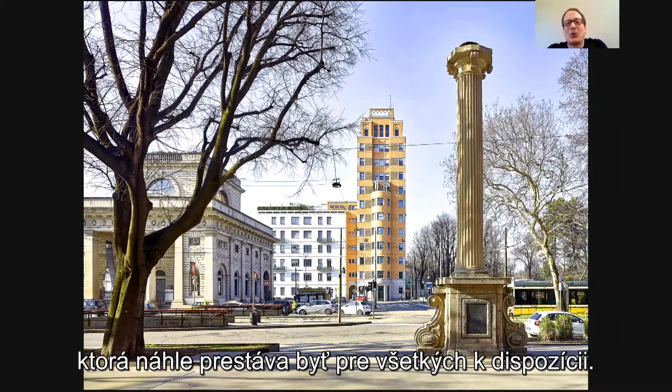So what I'm showing with these images is that the city, the vitality, the richness that we really enjoy about the city, don't come from monuments. They don't come from grand urban plans and axes. What they come from is a texture of the city. It can come from big buildings or small buildings, and it actually comes from a condition of incredible heterogeneity - but a heterogeneity that stops short of being a free-for-all. This isn't the heterogeneity of a new city in China, in the Gulf states, or in Canary Wharf in London. This is a heterogeneity where one looks at what came before, but then adds something new, something that somehow refers to the existing place.

And now I'm going to show, I think, 5 projects that we've completed in the last 8 years. Some are very recent, and as I said, a couple are from Zurich, but they're from different cities.

You'll see how a single practice, Caruso St John, working in different city centers, has celebrated and been inspired by the difference of the situations, and how we've allowed these differences to inform the character of the buildings, but also how we refer to certain paradigmatic urban buildings. The buildings of Milan I showed you are often references for us, and somehow those references creep into designs for buildings in Zurich, but could also creep into a design for a building in Cologne.

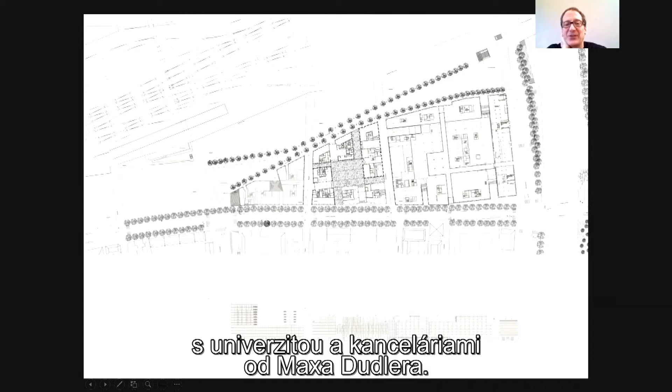So our building, this is the ground floor. The ground floor has the entrances to the offices, to the parking, to the apartments, and has retail. So it's quite complicated, the ground floor, to reconcile all of these entrances and exits.

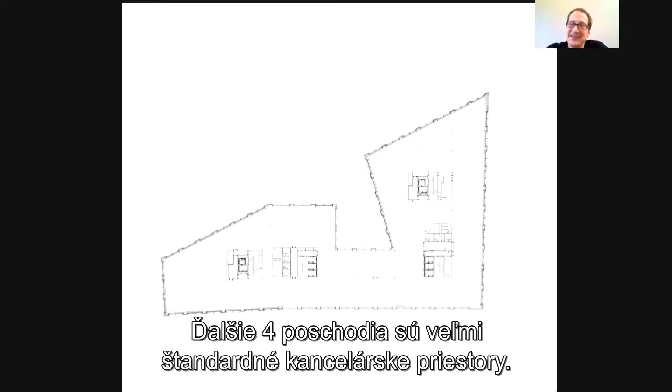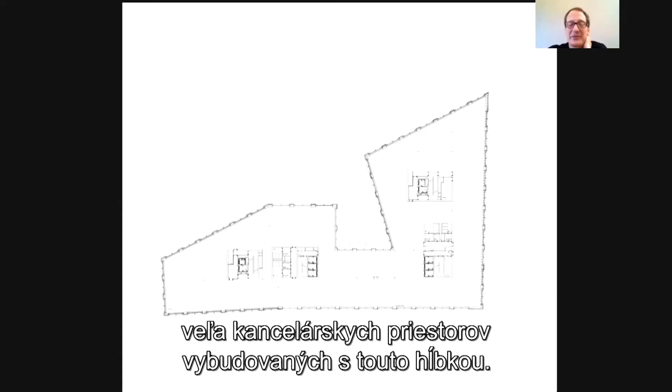Then the next 4 floors are very standard floor plates for office space, quite deep at the time for the Zurich market, but actually we were a little bit ahead of the curve because now there's a lot of office space that's been built with this sort of depth.

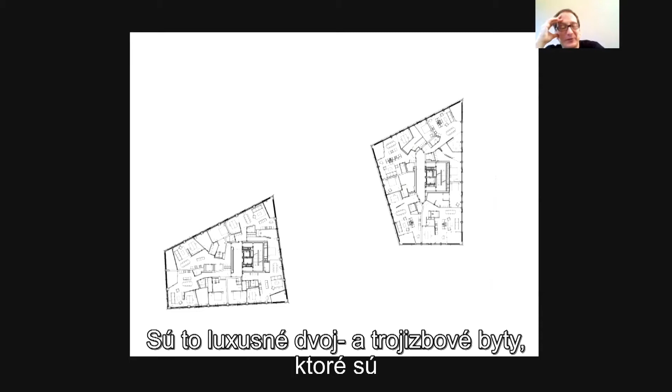And then above that, these 2 towers of apartments, a very big mix of apartments, so different kinds of apartments on different floors. And these are plans of the 2 top floors, the penthouses, which are really quite luxurious, 2 and 3 bedroom flats. Very ambitiously planned, and I'll show you a few photographs later.

But for us, the program is a given. It's an urban building. It has these commercial uses, and they have to be accommodated in a good way. But for us, the really interesting thing was, how do you make a building whose image and whose construction and whose presence in this place will really contribute to the idea of a city that's based on existing streets.

So this one, Lagerstrasse, but then this street, which is this new street called Europaallee. Our idea was that we would make a building out of masonry, not stone, because if we made it out of stone in the 21st century, the stone would be rather thin and it would really feel like a veneer. Instead we used large precast elements which are supporting themselves, so that the idea of the structure of the facade, the performance of the facade, is somehow making the image of the building more communicative.

And you can see that the facade is a bit heavier at the bottom and it gets lighter as you go up, and the way in which window openings respond, between the retail spaces, the office spaces, and the apartments. In a way the very practical requirements of the program connected to the formal and constructional ideas of the architecture give the building its image, give the building the means to become an articulate part of the city.

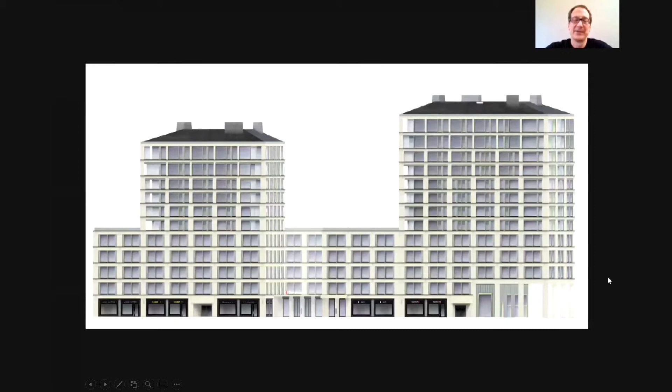So this is one of the elevations, and these are some of the drawings of the construction of these elements. There's an arcade at the head of the building, which has a bar, and it has these curtain-like precast elements in green. And then the more standard facade with these large column elements and beams and infills.

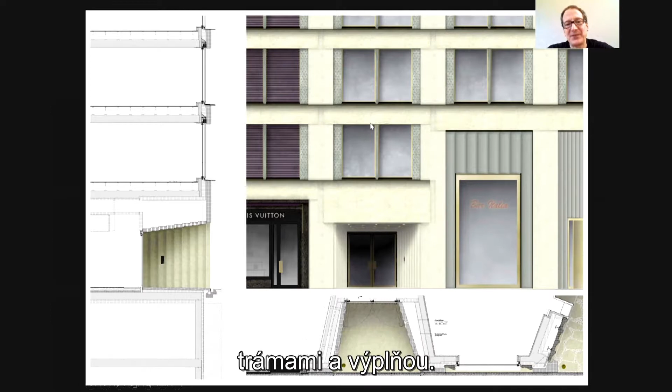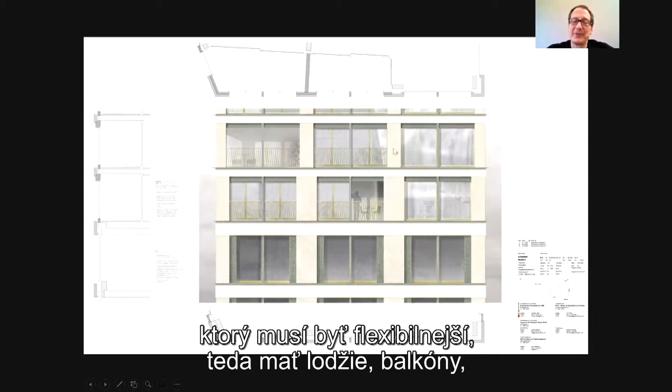And this is the residential entrance, which is more elaborated, and the shop front. The shop fronts are made in polished precast concrete, and the transition from the office building to the apartments, which need to have more flexibility in terms of having loggias and balconies and opening windows and smaller rooms like bedrooms and larger rooms like living rooms.

So there's quite a bit of variety within the facade, but that variety is controlled with an overall tectonic identity, which is about these columns and the beams.

We worked with an amazing precast company based in Flanders called Decomo. It was their first and almost their only building in Switzerland. It's very unusual for subcontractors from outside Switzerland to be involved in Swiss buildings, but they won this contract. And we did many, many tests about the textures and the finishes that one can achieve in precast. I mean, precast concrete really is like stone was in the 19th century.

It's a way of making incredibly high quality and differentiated material without involving enormous human power. You don't need to carve it, you can cast it.

So this is the building, that arcade I talked about with the bar and the green curtain-like facade infilling it, the residential entrance and the office facades. All of these are precast elements, they're all holding their own weight, sitting on a foundation on the ground. The bar facade, the entrance to the apartments, with the detail of the lighting.

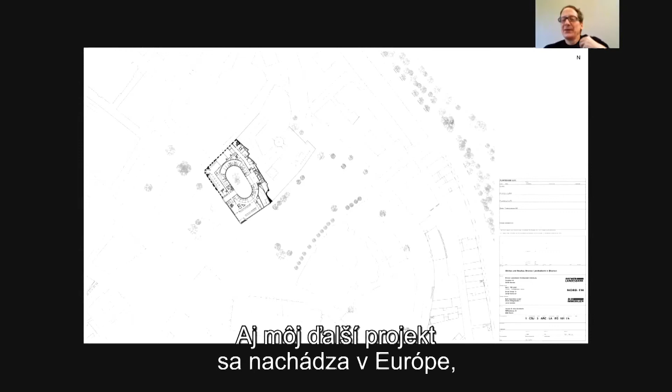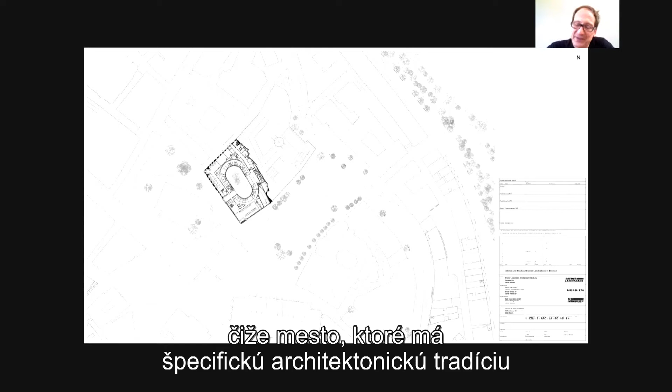So my next project is also in Europe. It's in Bremen, a kind of very old northern German city, a city that was an important Hanseatic port. So a city that has a very specific architectural tradition of building in brick. You know, Bremen, Hamburg, Lübeck, all of those Hanseatic port cities had this amazing big brick tradition.

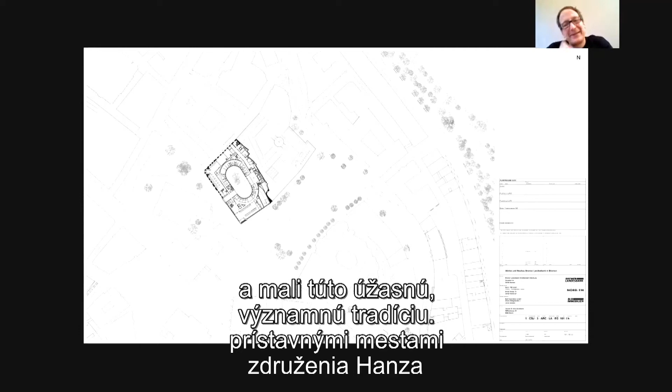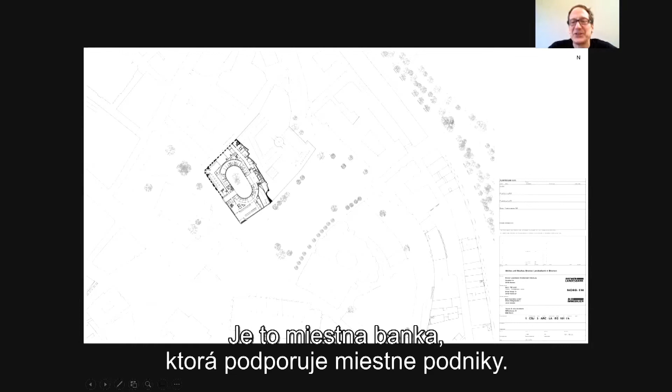And we were invited to do a competition to make a headquarters building for the Bremer Landesbank, the local bank which supports local businesses, to replace a building that they built in the 1980s, which was functionally a very poor building, but architecturally was even worse. And the building couldn't be on a more important site.

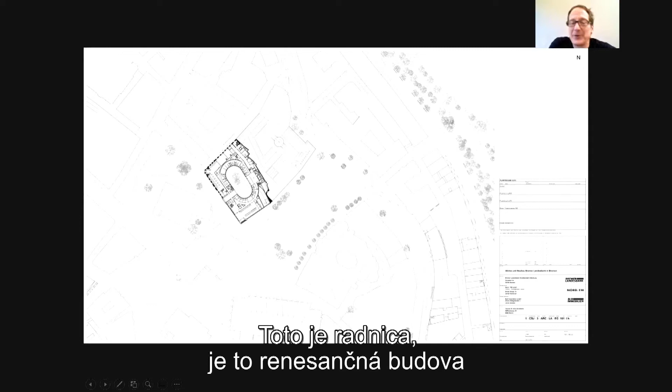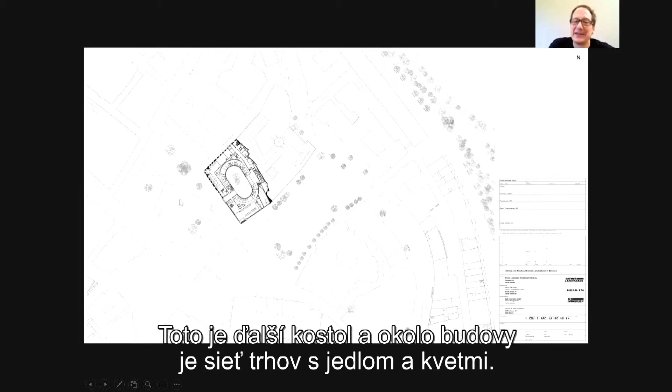This is the cathedral, this is the cathedral square. This is the town hall, which is a Renaissance building with additions from the 19th century and also a very, very high quality addition from the 20th century. This is another church, and there's a network of markets for food and for flowers that surrounds the building. The area is called the Domshof, and it's a UNESCO World Heritage Site.

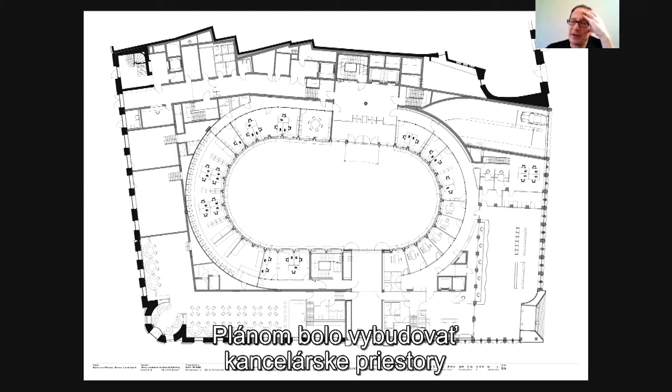And we made a project in brick, which I'll show you in a moment. The program is really an office building for about 500 people. It had a very, very prescriptive program which told you exactly how many desks had to be in what kind of office. And the way we organized the building is we made a courtyard.

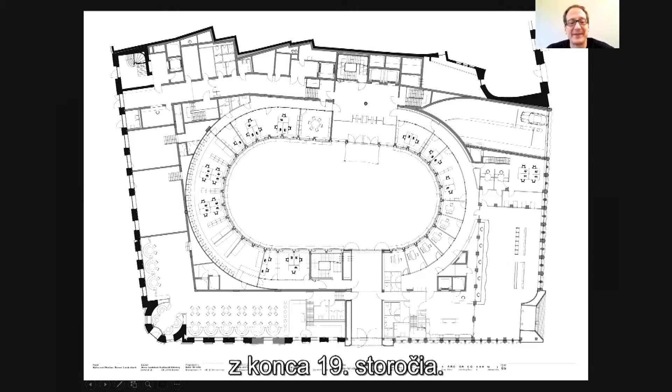The Domshof is on this side, on the right. There was an existing facade from the original headquarters building from the end of the 19th century. This is the new facades, and we made this building, which is like a donut, really, which on the upper floor, you can see how efficient it is. So it has offices around the perimeter, offices around the courtyard, and a kind of combi zone in the middle.

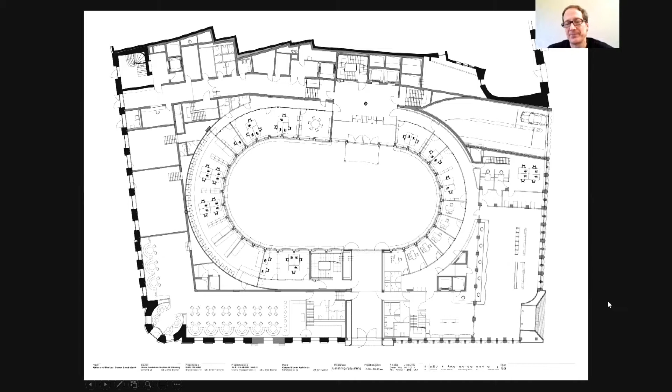On the ground floor, there's a banking hall on the Domshof and a porte cochere, which gives way to an entrance in the courtyard. The courtyard is publicly open, and they have concerts and things like that there. And then on the other part of the ground floor, there's retail. So again, a very typical urban program, but it's also a head office for an important company in the town.

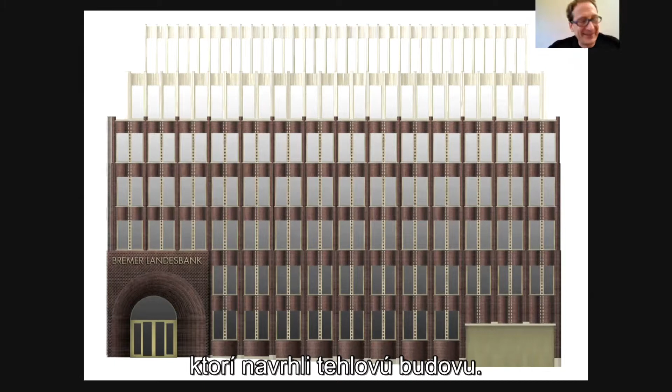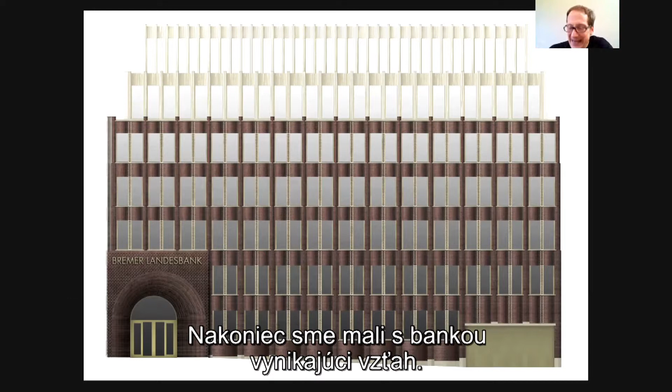We were the only non-German practice invited into the competition, and much to our surprise, we were the only practice who proposed a brick building, for a city which is famous for its brick buildings. All of the German architects proposed concrete buildings. Even though our building was maybe a little bit rich for the client, who would have preferred something a bit more explicitly modern, there was a very good jury and an excellent city architect in the competition jury, and we won. We had an excellent relationship with the bank, and it was an incredibly productive experience to make this very special building in this special place.

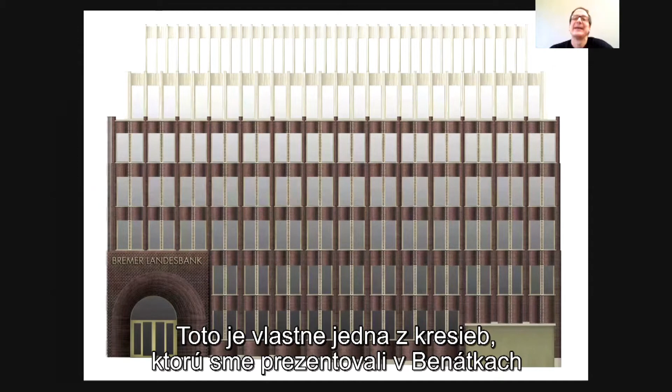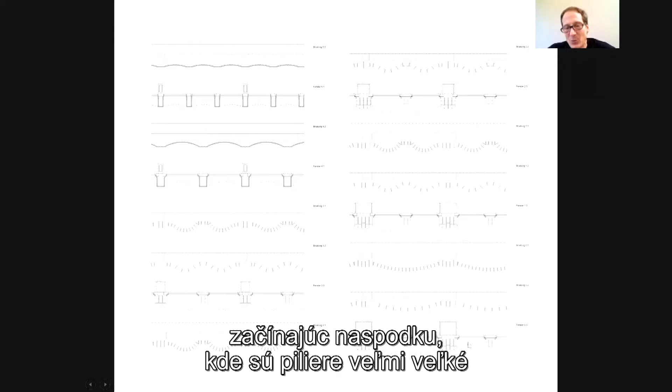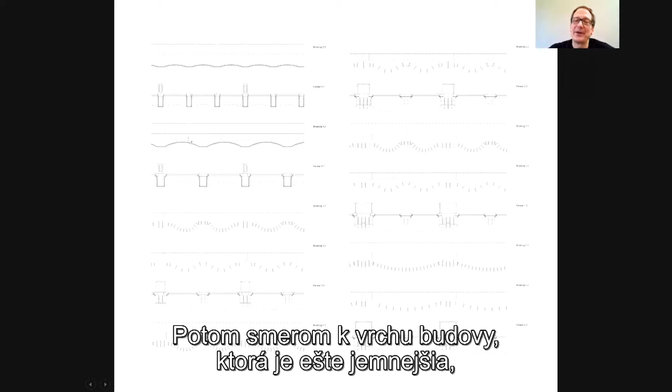This is a drawing of the facade, done when the building was finished, though we did a similar drawing for the competition. This is one of the drawings we showed in Venice, in an exhibition where we were showing urban facades. This drawing shows the plan detail of the facade, starting at the bottom, where the piers are very big and there's a kind of double order, getting finer and finer until the middle of the building where every bay of the window is expressed, and then to the top, which is even finer, where the brickwork becomes terracotta.

The tradition of this kind of Northern German architecture is closely related to English arts and crafts architecture. So we felt a closeness to it — Peter and I have for a long time really loved English arts and crafts architecture, and the way it was maybe the only time British architecture was avant-garde, at the end of the 19th century, with architects like Philip Webb and Richard Norman Shaw. It was typologically very progressive, but also referred in a very interesting and synthetic way to the traditions of earlier British architecture.

I think this Hanseatic brick architecture in cities like Bremen and Hamburg is similar. So you can see the building — this is facing the Domshof with the big entrance to the banking hall, which I'll show you later, the entrance to the car park and to a public toilet, which was part of our project, and then the offices. And then this roof level, which is also offices, but with a terrace and private banking at this level that can make use of these terraces.

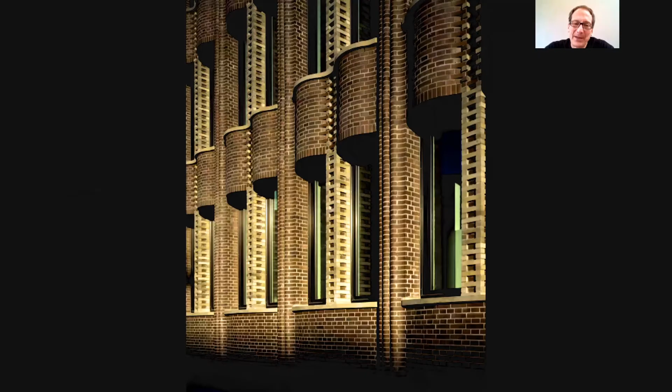But also there's this quality of weaving, of breathing and of weaving, especially in these places — the kinds of qualities you see in a 1920s brick facade in Bremen. But in other respects, the building feels very contemporary. When you're very close to the building, it also has a kind of material brutality. You completely understand that this brick facade is holding itself up and standing there, and that the elaboration and power of this facade is only justified because it's built on the Domshof.

It's not so much a symbol of the bank, although it's a little bit about this bank being a safe place to put your money, but it's much more that this urban space already has this extraordinary collection of buildings from the 13th century, from the 16th century, from the 19th century, from the 20th century, and we have a responsibility to add to this incredible urban constellation of buildings.

And the courtyard refers very heavily - maybe some of you recognize that it's referencing Sigurd Lewerentz's Social Security office in Stockholm, a building whose plan works in a very similar way, with offices around the courtyard and around the external walls, and which has a very similar proportion.

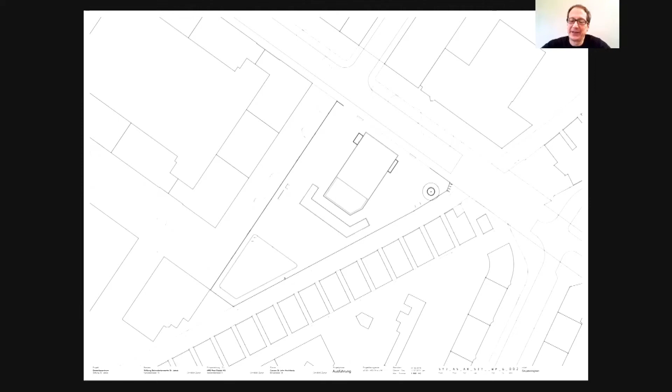The next building is a kind of completely different kind of building. It's in Zurich West in Zurich, which used to be an industrial area. I talked about it before, and it's largely gentrified. But the interesting thing in Zurich is they always try and keep all of the areas of Zurich mixed. This is the enormous viaduct I was talking about.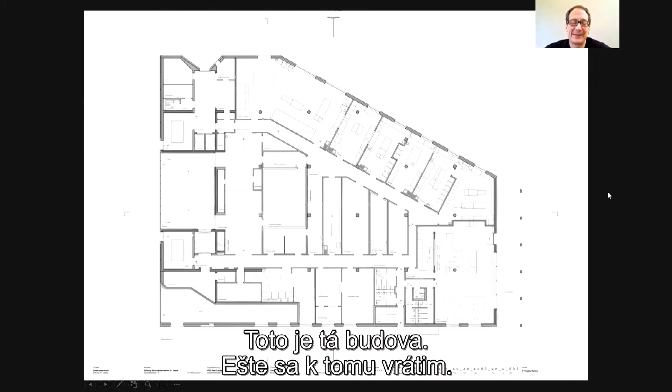And this is the building - I'll come back to that. The building is a factory building for a foundation called the St. Jakob Foundation, who employ disabled people. They have a bakery, a facilities management company, they do joinery, all sorts of things. They had a factory in another part of town, but they'd outgrown it, so they needed a new factory building.

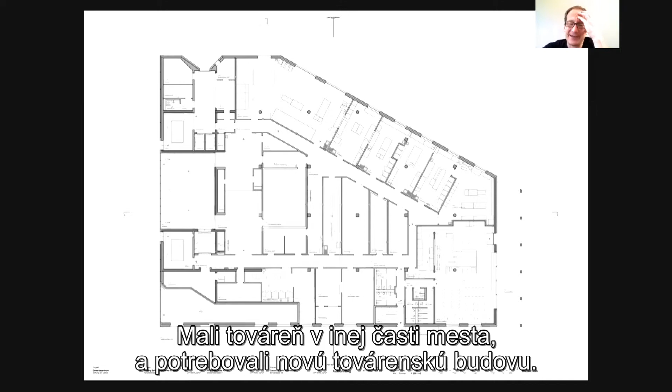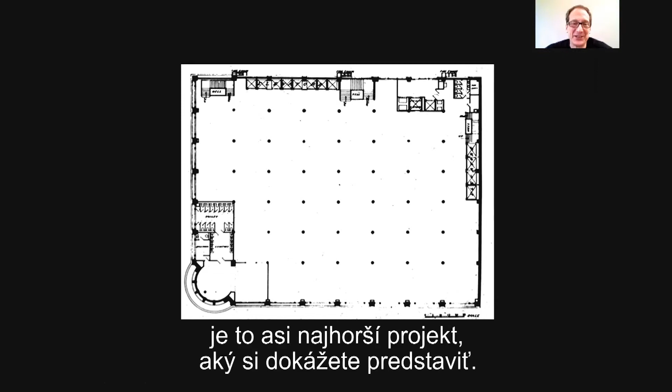And because our building is for St. Jakob, and they have the St. Jacob's shell as their symbol, their logo, we made a building that you'll see in a moment has something to do with that.

So the plans of the building are brutally efficient. This is a typical plan - you can see the core is here on the west with 2 stairs, some lifts and the toilets, and then there's an open space for production and assembly. And then there's a balcony around the edge, which allows you to go outside and have a rest, but it also means that we don't need any fire escape stairs anywhere else.

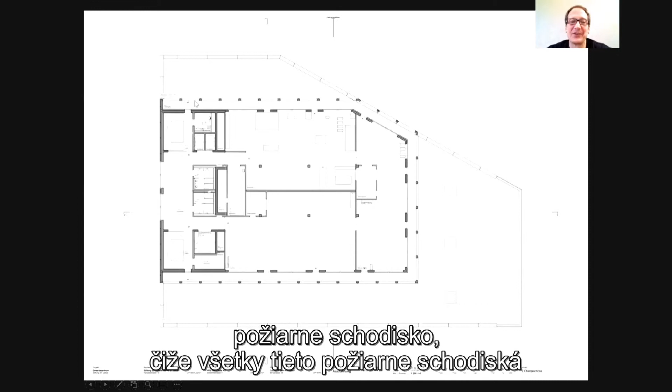So all of the escape stairs can be at the western end, which means that the rest of the plan can stay as open as possible. So it means it's a brutally efficient plan.

And in common with the other 2 buildings I showed you, this part of the facade is load bearing as well. So this balcony idea means that the structure can be cold. So it means that it's a real structure. And so the problem of it holding its own weight gives a certain power and energy to it.

But in other respects, the facades of the building are using a lot of technical tricks, and things are not always what they appear to be.

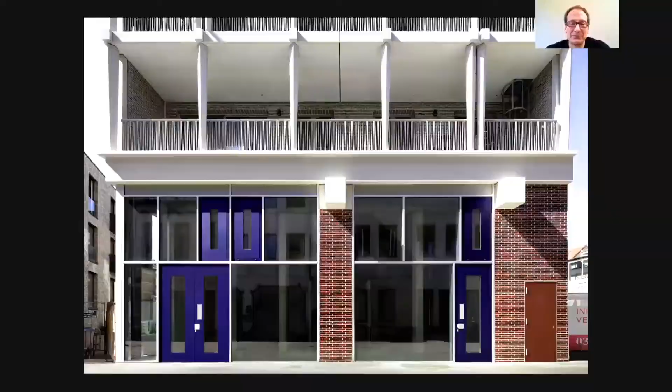Oh dear, I have to go back. I don't know what that was.

Sorry about that. This is the rear facade looking south, where there's a cafe at the ground floor, and then these open verandas in a way for the workshops. And on the top, there's a mensa and a kind of community room for the foundation.

The street facade is precast concrete. These elements are 18 or 20 centimeters thick with these seashells cast into the surface. But around the rest of the other facades on the plinth of the building, they're actually made of fiber cement, which is only 20 millimeters thick. So it's much, much thinner.

And you can see it sort of bends up like a piece of paper to make a place for the marquise, the sun protection, to park. So although the 2 look the same, they're both white, they're actually working in a very different way. They cost a different amount, but they kind of have a uniformity. And of course, the structure of the balcony is also precast because it's structural, it has reinforcement in it.

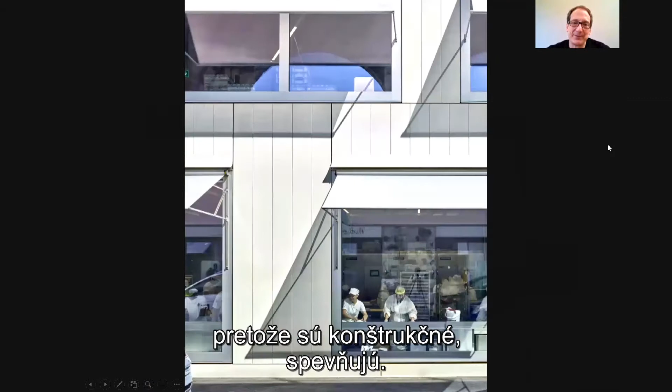There's the bakery, and they have this very close interface to the surrounding streets, which was something the foundation was interested in, to show how their people do their work. And then the stuff that they make in the bakery goes all over the city, but it also goes to the cafe, which is in the building, which is here. And there's a small planted park, and it's a very pleasant space, which people in the whole quarter use.

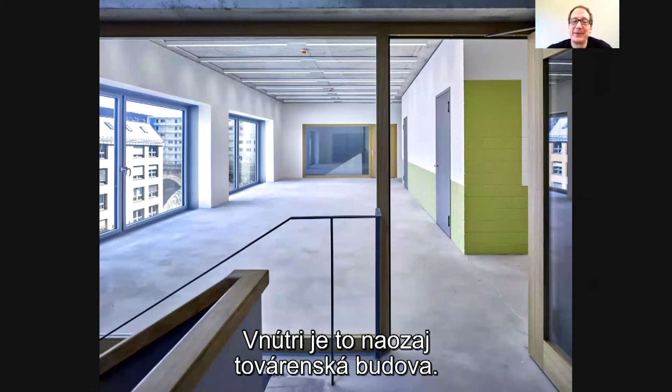And then on the inside, it's really a factory building. So this is the core zone to the west of the building from one of the stairs. The stairs are very generous because that's the way people go up and down the building. This is the sort of common space, the toilets, the entrances to the toilets, and this is the factory spaces. Very, very basic. This is a building that was not expensive.

It was also built with a kind of very particular total contractor contract where we worked for the contractor. Actually, the competition was with the contractor. So the competition was for a design and for a price.

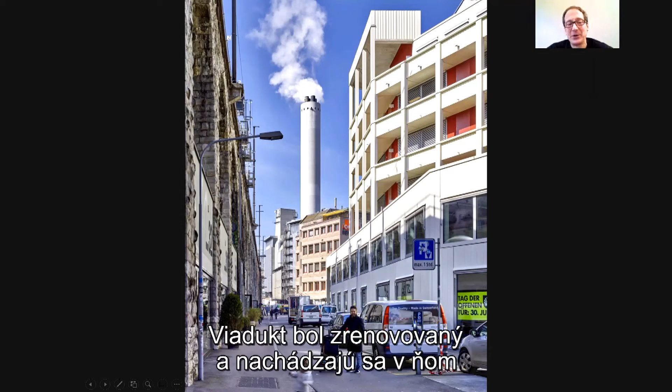Yes, and our building and the viaduct, and the way they make a street between each other. The viaduct has been renovated and it has retail units and restaurants in it. So this becomes a kind of city street, but a city street within this area that still has a very clear industrial morphology.

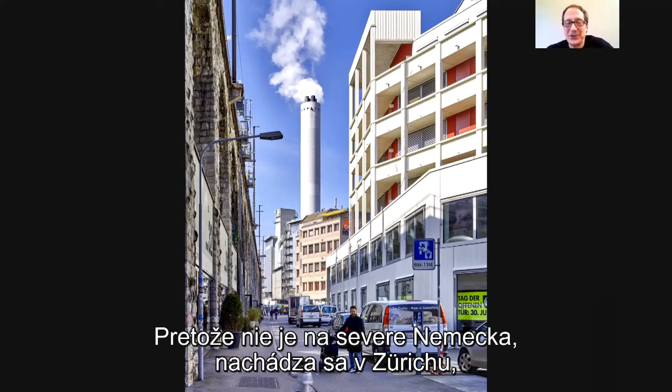It's really an amazing opportunity. Making this headquarters for a bank in Bremen was amazing, but it's also just making an industrial building, and an industrial building in such a special and central place in the city is amazing too. It's full of opportunities, and you can see how this building has a completely different expression from the Bremen building, because it's not in northern Germany, it's in Zurich, but also because it's a factory building, not a headquarters for a bank. Those things are still relevant when you're designing a building as an architect.

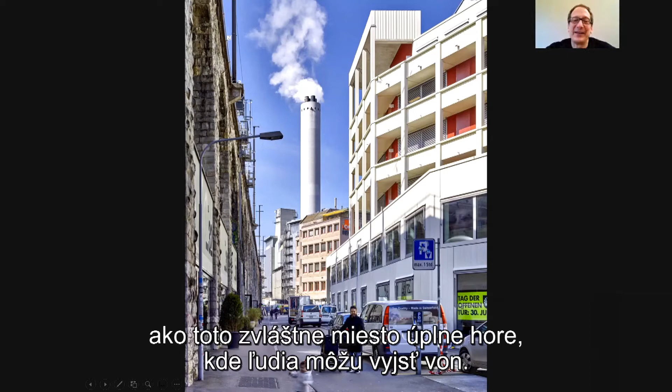Not all buildings have to be made out of glass or have funny shapes. Although, this building does have some funny shapes, like this special place right at the top where the Mensa is, where people can go out.

The next project I'm showing is in Antwerp, in Flanders, in the old dock area, which has some similarities with the site I just showed you in Zurich. It's an area which used to be industrial and had a lot of workers' housing, and it's been the area of a lot of redevelopment in the last 15 years in Flanders. Flanders has a really amazing architecture scene, so for us it was really interesting to become engaged in it.

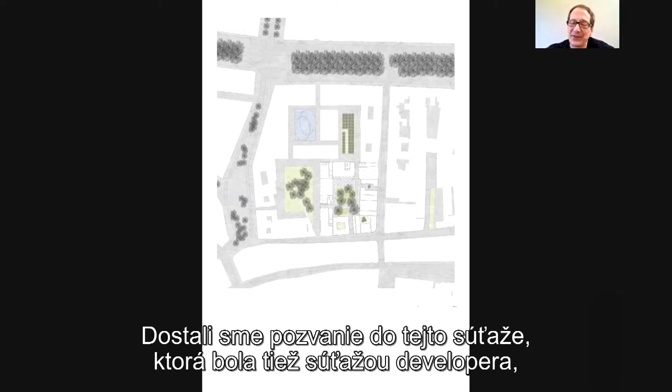We were invited into this competition, which was also a developer competition. We were invited by a developer, but our name was cleared by the city architect to make this project, which was part of a greater master plan made by Rapp and Rapp architects, who had already made this building, which was already under construction when we did this.

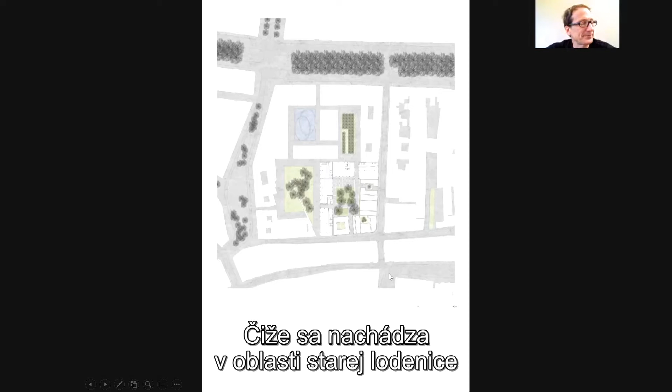It's in the old dock area on a street called Falconplein, on the site of an old convent, an old institutional, religious building. So this is our site, and the competition was very optimistic and almost idealistic.

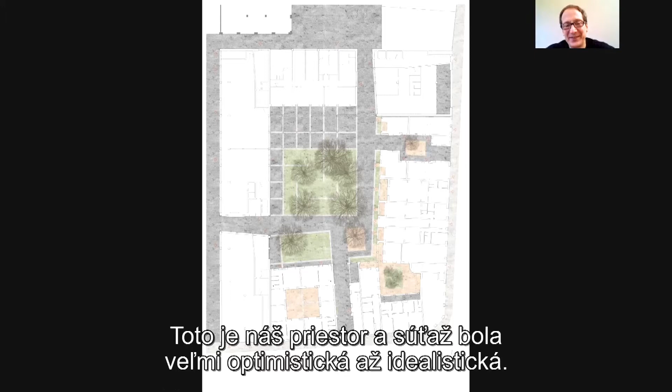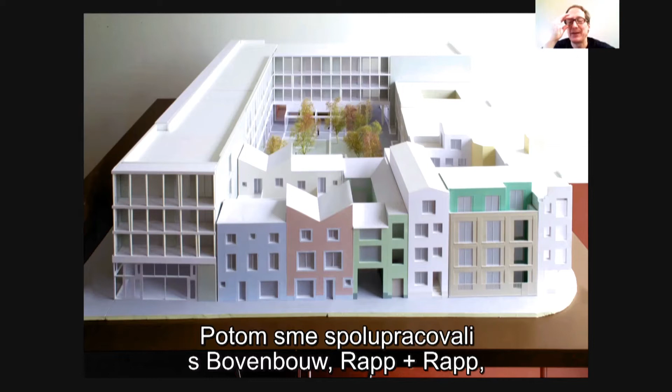It's a competition where we made the project with a number of other architects. We were the main architects, and we made the big building, which is a mixed-use building with ateliers, a kindergarten and community spaces on the ground floor, and apartments above. We were collaborating with Dirk Somers of Bovenbouw, with Rapp and Rapp, with another young Flemish firm, Ono. So there was a number of architects working together to make this whole urban ensemble, which is around a court space, which was what the master plan said you should do.

Through various porte cochères here and here and here, you can get into this courtyard, which is a public space. From the courtyard, you can get into the kindergarten, most of the apartments, the community space, and the ateliers. So really almost a 19th century or early 20th century idea of the artisanal city. A program which goes very well with the history of the area, and a density which is completely reasonable.

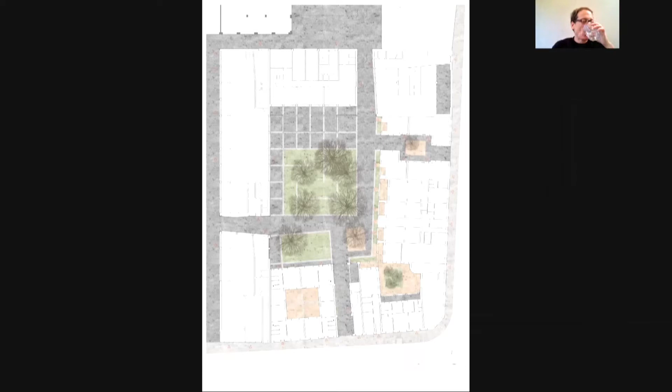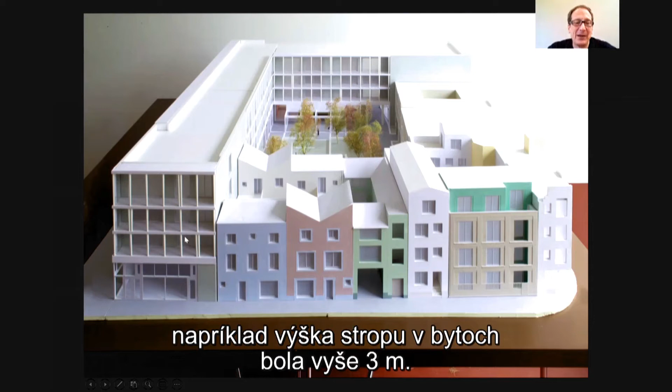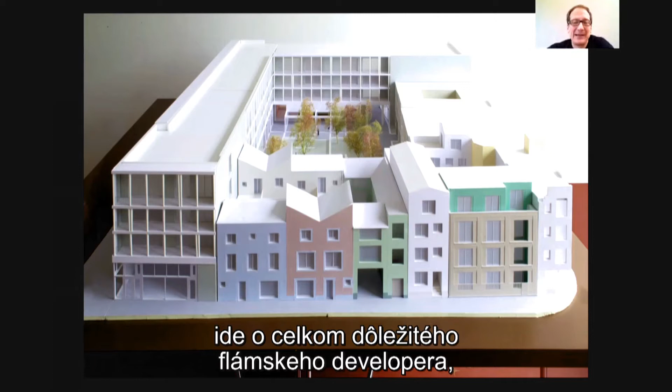An interesting thing about the project was that the city was demanding a very high environmental rating - it had to have BREEAM outstanding. Even within the master plan, there were things done to accommodate that. The floor to ceiling heights for the apartments were over 3 meters, so you had maximum daylight penetration into the unit. You could really benefit from natural light and minimize the use of artificial light, and also maximize the potential of cross ventilation. So there were a lot of really nice things in the project, and the developer, who's a quite important Flemish developer, was really a great collaborator.

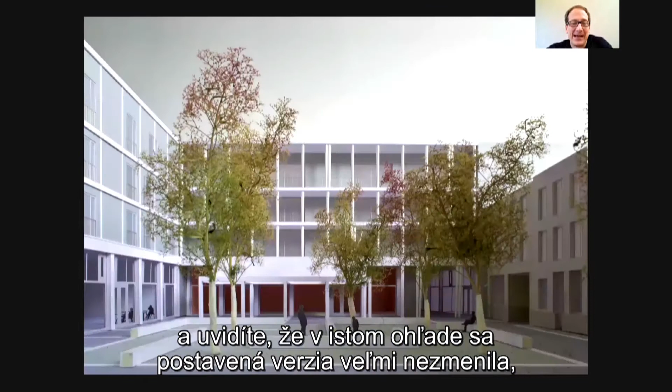This model is a big model done at 1:50, something we did during the competition. You'll see that in some respects, what was built hasn't changed very much. The tectonic development of the project has changed a bit - it's developed, it hasn't changed.

That's the street view where our big L-shaped building just becomes one of the houses on the street. So this is the street. The other buildings aren't finished yet, so in a way the photographs I'm going to show you, it's only the project two-thirds complete. It was only finished a couple of months ago.

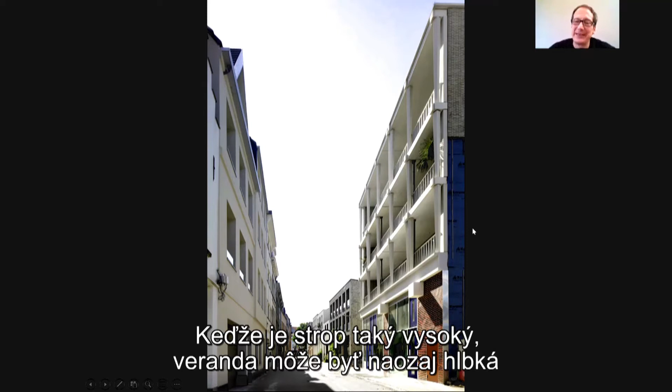This is how our building appears on the street, with these big ground floor spaces, which are 5.5 meters high - big spaces. The idea is that they're ateliers, offices, a kindergarten. All of the spaces have the potential to have mezzanines put into them. The building has this expression of a base with these big consoles, which hold either an open veranda - and because the floor to ceiling heights are so big, the veranda can really be deep, becoming an outdoor space you can use - or there's brick facades, which you'll see as I go through the slides. This is the presence of the building on the street, and you can see it's very similar to what we had in the competition.

So you see, these are 2 atelier units with apartments above. And then we're now in the courtyard, but on the left is the porte cochere, the way we got from the street into the courtyard. And this is an atelier and one of the entrances to the apartments. And then that's the courtyard.

You see there's a very strong tectonic order, like all of the projects I'm showing you, but very different from the Zurich buildings or the Bremen building. Here we're really trying to engage with a way of making architecture that has something to do with Flanders, a tradition even closer to the English tradition than Bremen is - making buildings in brick, vertical window openings, a cold and rainy climate where outdoor spaces have to be generous or they become damp and unpleasant, and even the idea of the courtyard or the square. You can make a connection to the idea of squares in British cities.

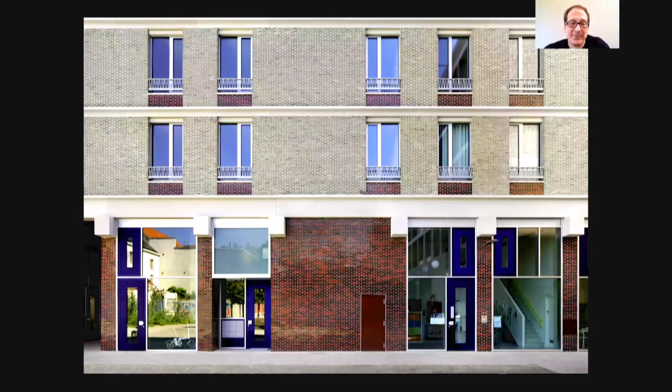The other kind of facade - for this block, the other side, which I'll show you later, is the side that has the veranda, facing west I think, and this side is bedrooms. So the entrances to the apartment here, also here.

Industrial unit and part of the kindergarten, and then these windows to bedrooms - you can see the kind of vertical proportioned windows with openings and a balustrade so you don't fall out, and a very strong and robust tectonic of precast concrete string courses held by panels of brickwork. A very beautiful greenish, light green brickwork, which is a Flemish brick.

One of the entrances to the apartments. This is a very low budget project - construction budgets in Flanders really are quite low, and it was a real challenge to control quality. The collaboration with the client was terrific, and with our local architects, we worked with Bureau Bouwtechniek, a practice who only support other Flemish or foreign architects during the construction period. They were great as well, but it was a challenge on site - the contractors were not so easy to work with.

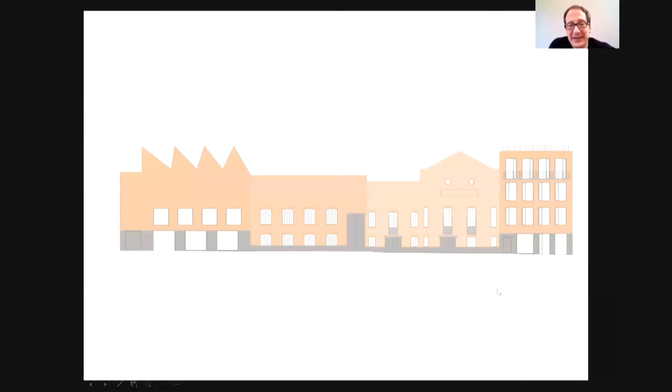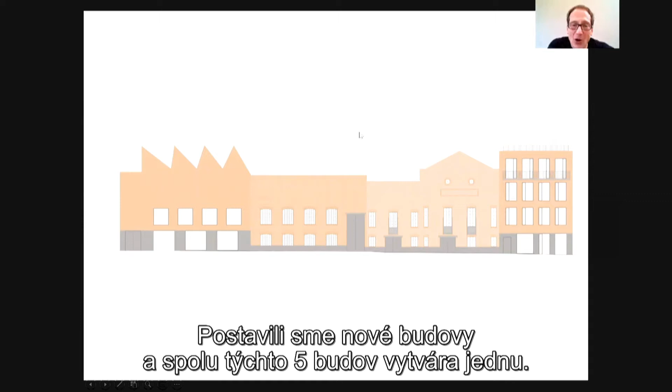It's a building where the three central buildings were listed scenery painting workshops, so these were listed buildings which we had to keep. We demolished two much worse quality buildings on this end and this end, and made new buildings. Altogether these five buildings make one.

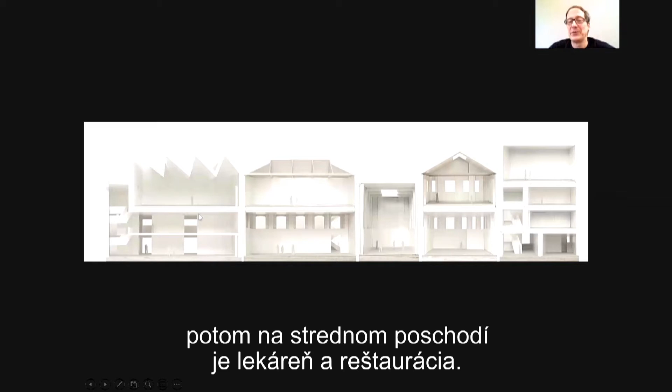The interiors of the existing warehouses didn't really exist anymore, so there are new interiors inside. We organized it so the ground floor is a continuous network of galleries, and there are three stairs in the building so you can go up to a first floor suite of galleries. On the middle floor there's a pharmacy too, a restaurant, and in this building, which is more like a warehouse, there are offices, viewing rooms, and a shop on the ground floor.

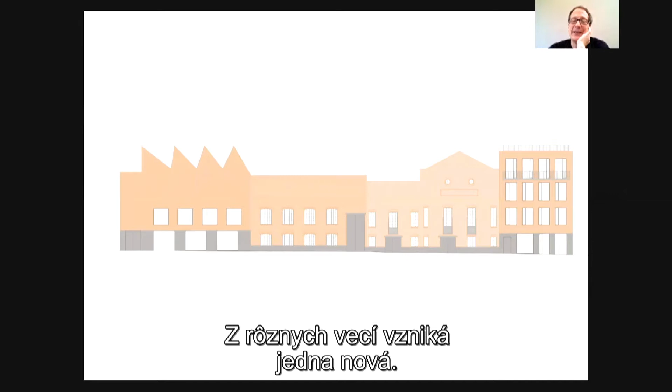So the way this is like that picture is that it's one thing, but made out of a diversity of different forms — taking different things and making a new whole. In a way, it's a paradigm for the way I'm talking about the contemporary city, or the 20th century city.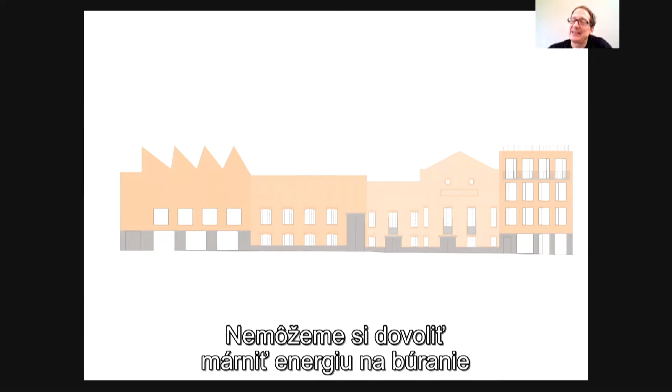Unlike the previous buildings, this one largely keeps existing structures, which is something we've always done a lot of in our office and which I think is more and more important. We should not be demolishing buildings today — we should be reusing buildings that are already there. We cannot afford to waste the gray energy of demolishing and disposing of the material of a building. I also think that if we didn't demolish so many buildings, the identity and vitality of the city would have a better chance of surviving the brutal onslaught that late capitalism brings to bear on it.

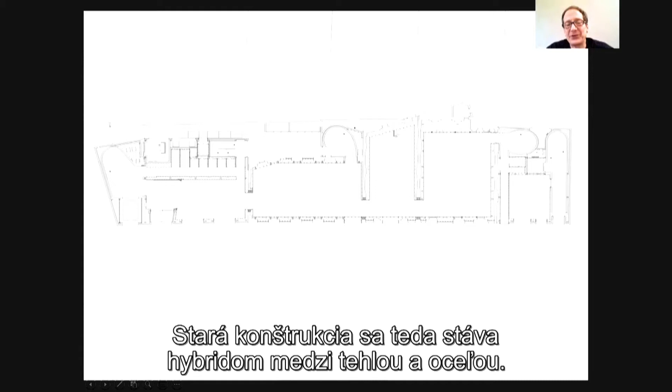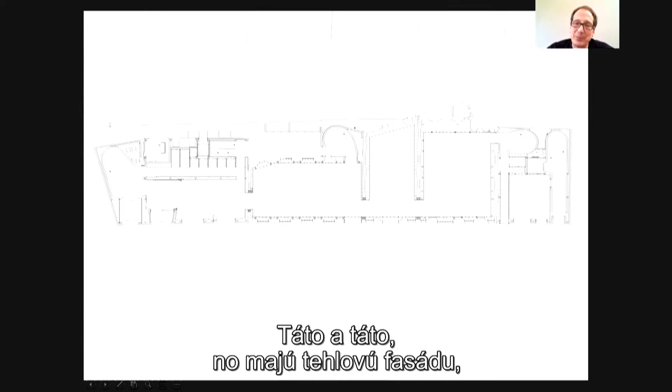This is the ground floor. You can see the existing building is all brick structure, but to make the new floor strong enough to hold the art displayed there, there's a steel structure on the inside, so the old structure becomes a hybrid between brick and steel. The new buildings have a steel structure, but with a brick facade that's a full brick thick, so it holds itself up — a self-bearing brick facade. So it's also a kind of hybrid structure.

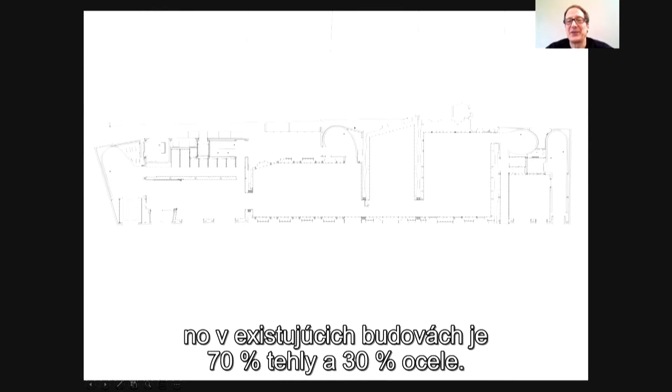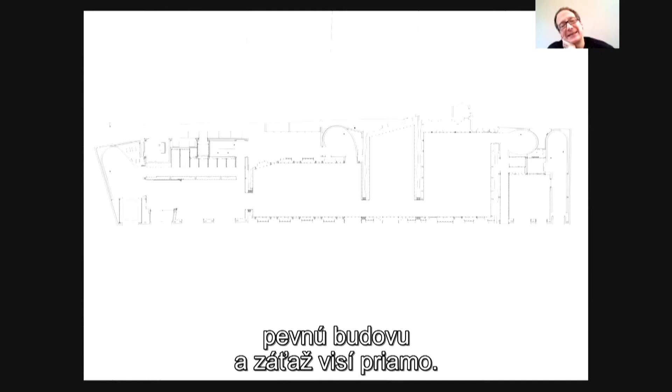Whereas the existing building is about 70% brick and 30% steel, the new buildings are 30% brick and 70% steel in terms of what's bearing the loads. By having these different kinds of hybrids, we could avoid having silicone joints and make a building where it's stable and the loads are coming down in a direct way.

Then these stairs, this one and this one, which are rather elaborate and very special - I'll show them to you in a moment - they are brick structures on the inside and on the outside, completely brick structures. It's really these stairs which shift the building from its previous life as an industrial building into becoming something like a public building, between an everyday building and an institutional building.

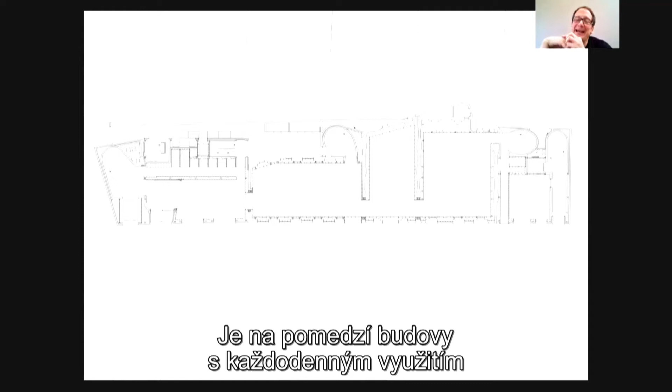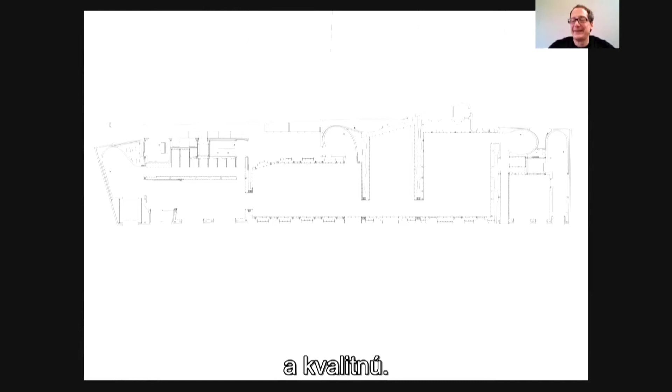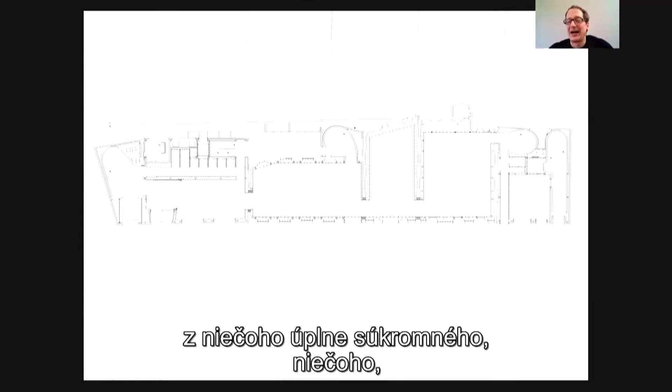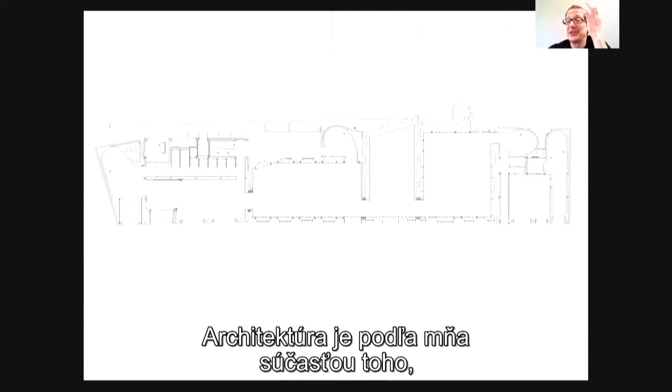Damien Hirst was not interested in making this building pompous. He wanted it to be robust and have qualities, but he didn't want it to be tacky. He was also interested that it somehow recognized the fact that it was going from something completely private - derelict for the last 30 years, unused - to something public. I think architecture is part of how you articulate that change in the use and life of a building.

When we were making the new building, we had to pick a brick that was between all of them. It's not very expensive, although this project is not cheap at all - it's quite an expensive project, but the bricks themselves are rather modest. It really took a long time to find bricks that would sit comfortably next to the old bricks.

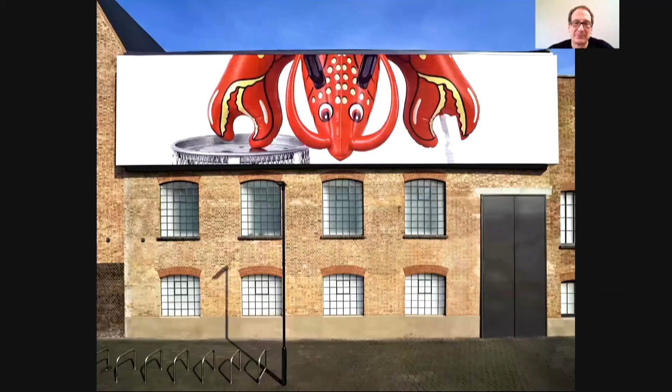There's this Jumbotron screen in the middle, which was a late addition, a kind of amazing thing, also very big, and it always has a program of moving or still images that relates to the exhibition at the time. This is what it looked like when the Jeff Koons show was on last year.

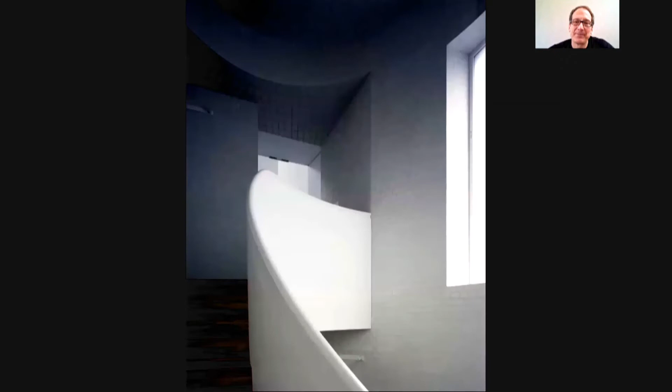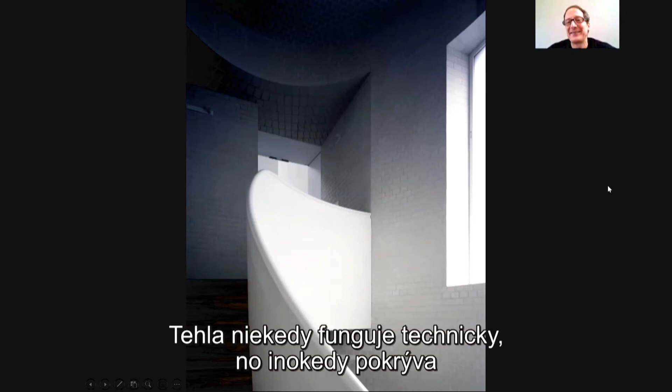A view down this beautiful stair and up, brick clads the whole of the space. So this brick is holding the loads, but clearly the ceiling is not holding the loads—the ceiling bricks are glued onto a precast slab. So the brick is sometimes working in a technical way, but other times it's about making an all-encompassing surface in the building.

So we never, although we're of course super interested in construction, want the construction to just be didactic. We're much more interested in the construction being something which gives character to the building. For us, the construction is the way in which you make an expressive architecture.